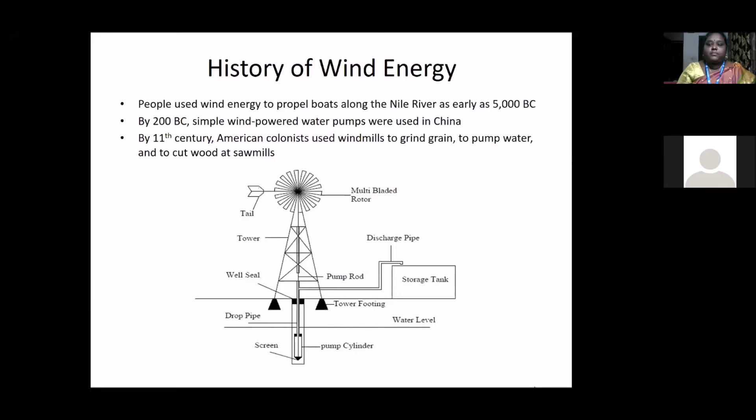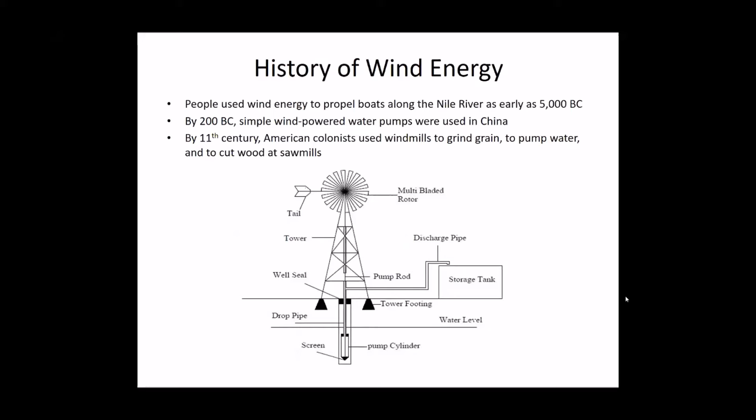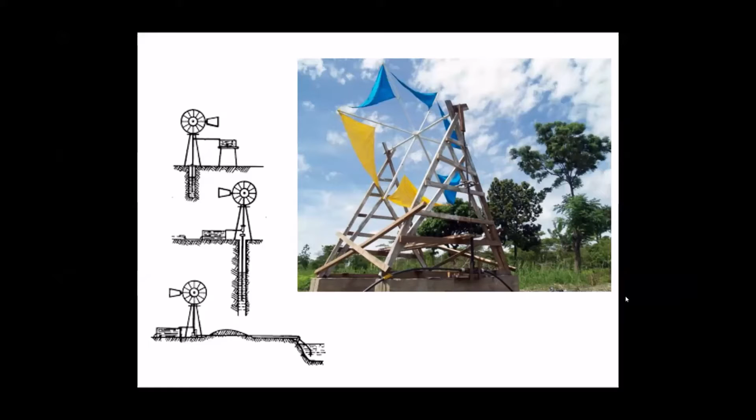So with the help of this oscillating or rotating motion, we have pumped out the water from the soil, which we use for rural irrigation next to our college.

One more important topic, guys: windmill and wind turbine. Both are two different topics, but these two words are generally commonly associated with many people - when they see a wind turbine, they call it a windmill. Windmill is a completely different story, and wind turbine is a completely different story.

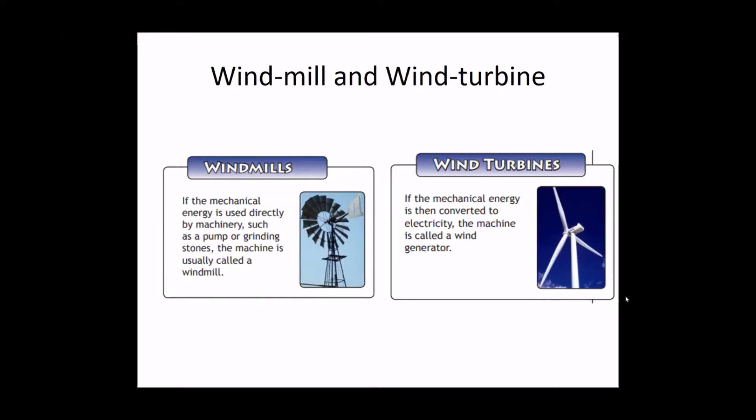Windmill generally uses wind mechanical energy, and that is used only for certain machinery applications like pumps or grinding stones or pumping water. A wind pump is a windmill. For some areas, they even grind with the help of wind energy, so those are windmills too. When we generate electricity out of that, it becomes a wind turbine - else it's just a windmill. Make sure from today onwards, after this session, windmill and wind turbine should be differentiated.

We have two different types of wind turbines. Generally, the classification of wind turbines can be huge, but in general we have two main types: one is a vertical axis wind turbine, and another one is a horizontal axis wind turbine.

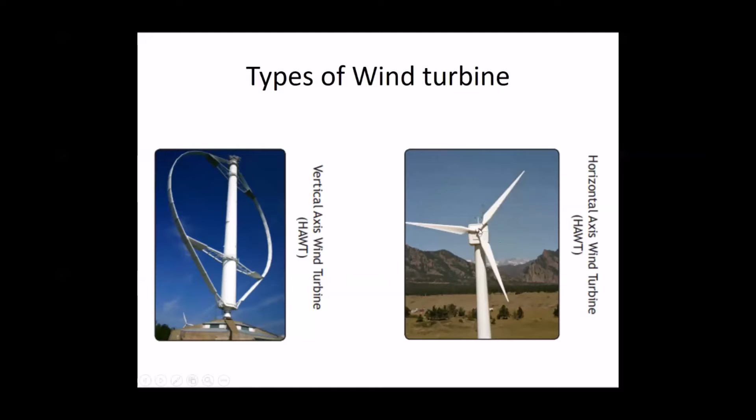In a vertical axis wind turbine, you can see this one center pillar - this is called the tower. So the axis of rotation here is in the tower, and it's perpendicular to the ground, which is why they call it a vertical axis wind turbine. In a horizontal axis wind turbine, the axis of rotation is perpendicular to where I'm pointing, and parallel to the Earth's surface - so this is called a horizontal axis wind turbine.

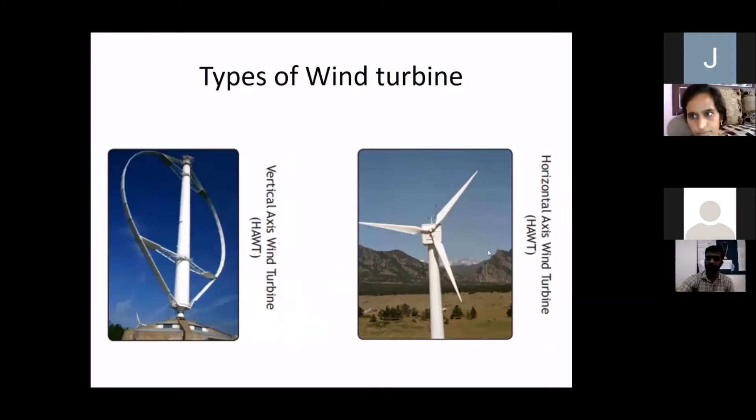In most of our common engineering applications, we find horizontal axis wind turbines as a major advantage, because in vertical axis wind turbines, each of the blades cannot get wind at the same moment. As the height above the ground increases, the speed of the wind increases, so to get the maximum efficiency, we need the maximum wind speed.

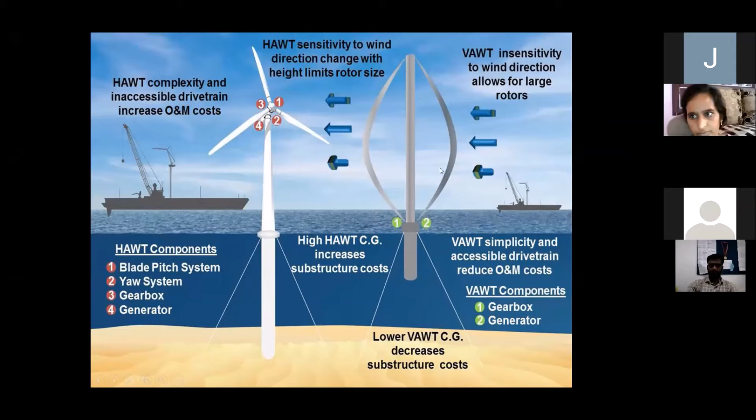In order to get the maximum wind speed, we have to get the maximum height of the tower. But if you have the maximum height of the tower, at the top you'll get very less efficiency because of the shape - it's somewhere near the center, or elliptical, towards the bottom only. So even though the height of the tower is increased, this cannot get the maximum efficiency.

Whereas in a horizontal axis wind turbine, the height of the blade, the height of the axis, or the height of rotation and speed directly depends on the height of the tower. So the more the height of the tower, the more the efficiency of the turbine. For commercial applications, we generally go with horizontal axis wind turbines, and for very small applications like less than 100 kilowatts, or even 5 to 50 kilowatts, we go with vertical axis wind turbines.

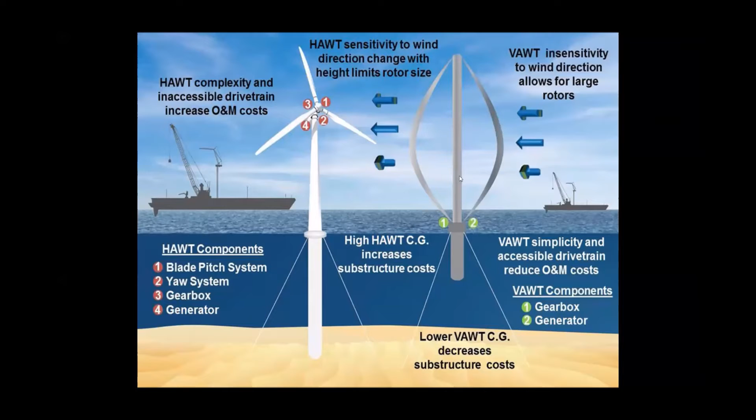This vertical axis wind turbine is generally used for home applications. It is very low in cost, around 4,000 to 5,000 rupees for one small turbine. We can even make it at home, and use it to charge a battery and a fan for us. I'll show how it actually comes.

Coming back to wind energy and the history of wind energy - how does a wind turbine work? Even with a huge tower, we completely rely on the wind direction and the lift force of the wind. So even if you have a big tower and a big blade, the shape of the blade and the angle at which the attack comes, and the angle at which lift is generated, are all very important criteria for a wind turbine to work.

All the fluid dynamics comes into picture on this aerofoil shape. These aerofoil shapes were designed in such a way that, before designing, there are two things to consider. When air or any fluid comes and hits a surface, there will be two things: one is lift, the other is drag. If the drag is more, the object will not fly, it will come down. If the lift is more, the object will fly.

These aerofoil shapes are designed so that when air hits them at a particular angle of attack, the resultant force of lift and drag drives the turbine or blades to rotate. The lift will be more than the drag, so the resultant force lifts it upward, creating rotation. In this way, we convert the kinetic energy of the wind into mechanical energy.

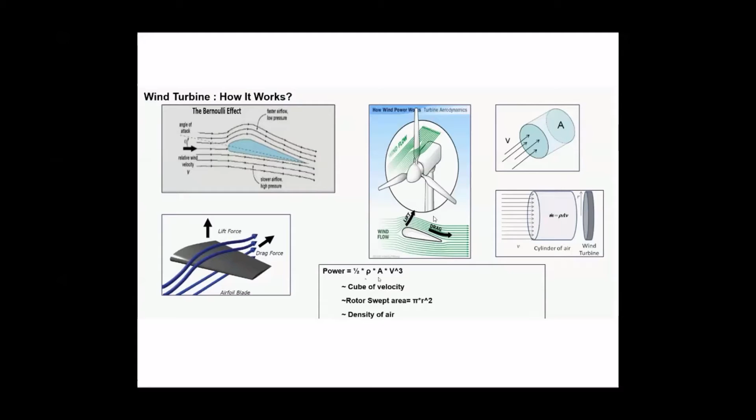Whenever you think of the efficiency of a wind turbine, first we need to know the efficiencies of different renewable sources. Let me compare wind with solar energy. With solar, the maximum commercial efficiency - and commercial efficiency differs a lot from standard efficiency since it accounts for all operating conditions - comes out to roughly 9 to 15%. 15% is also under very standard, optimum conditions. So 9 to 12% is the common or general efficiency we achieve in solar energy.

But when it comes to wind, the value I'm showing is also a theoretical value. If anyone asks the maximum wind turbine efficiency possible, the answer is 59%. It cannot go beyond 59%, and this is a standard value. But with some turbines I've worked on, like Siemens Gamesa or Vestas wind turbines, they can generally give around 35 to 40%.

45% efficiency turbines are considered much better, the greatest design we can achieve. In general, we achieve 35 to 40% efficiency. But the maximum wind turbine efficiency that can ever be achieved is 59%, derived from a theorem by a great fellow named Betz. If you search Betz's law on the internet, you'll find it - it's a very common theorem. He stated it cannot be achieved beyond 59%, and all wind turbine designs are based on this.

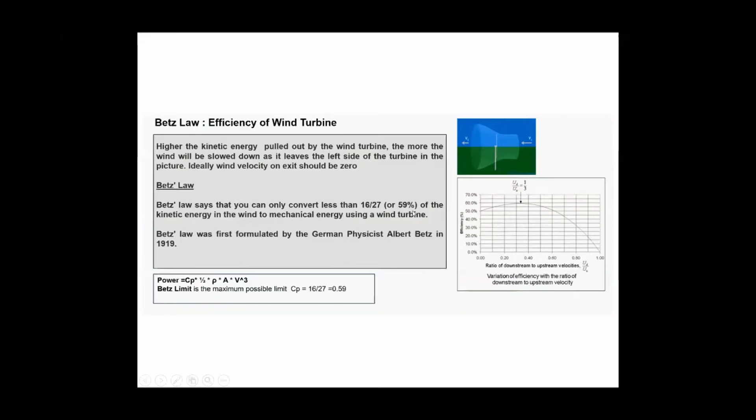When we come to components of a wind turbine, we'll be discussing horizontal axis wind turbines more, since that's the trend we follow commercially. I'm not denying vertical axis wind turbines - we do design them - but they're not used much for commercial applications.

In a horizontal axis wind turbine, we have three different parts: tower, nacelle, and rotor. The tower is generally just a column on which the complete nacelle and rotor sit. Apart from that, there's no particular purpose for the tower, but just imagine the weight it carries.

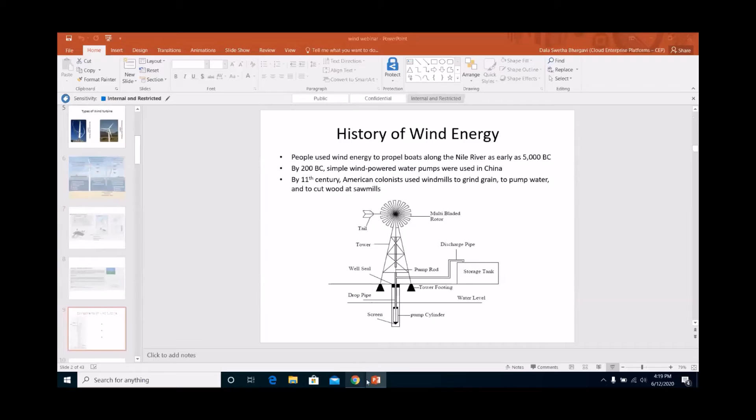I think everyone is muted, right, Hemanand sir? Yes, sir, everyone is on mute. Okay, muted, fine. If you can proceed, unmute, okay fine, I understand. Yeah, it's okay, muted. You unmuted them, huh? Yes, yes, you can proceed.

Shiva, okay, see, imagine the weight of this nacelle - it's not just 100 kgs, or 200 kgs, or 1000 kgs. For a 3 megawatt turbine, the weight of the nacelle is almost 300 tons. Just imagine the weight of this nacelle, for a 3 megawatt turbine which is considered a very standard size. The weight of the nacelle is almost 300 tons, and there are countless things inside that nacelle. It seems very small from the bottom, but it's the main heart of the complete turbine.

And you can see these blades - we have three different blades and a rotor. A rotor has the shaft which converts the energy of the blades to the nacelle. This tower completely takes the load of almost 300 to 400 tons.

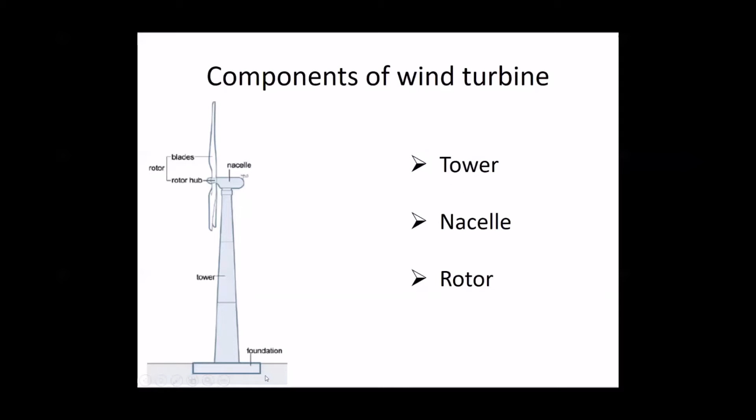It can be even more, and that complete tower weight will be transferred to the foundation. So we'll go in detail one by one on how a tower is constructed, how a nacelle is constructed. Then I think we'll get a much bigger idea.

If you see tower construction, these sort of lattice towers you can see in many places. For example, if anyone has taken a road drive from Chennai to Bangalore, you can see these sort of turbines in number. I think at least I have witnessed them.

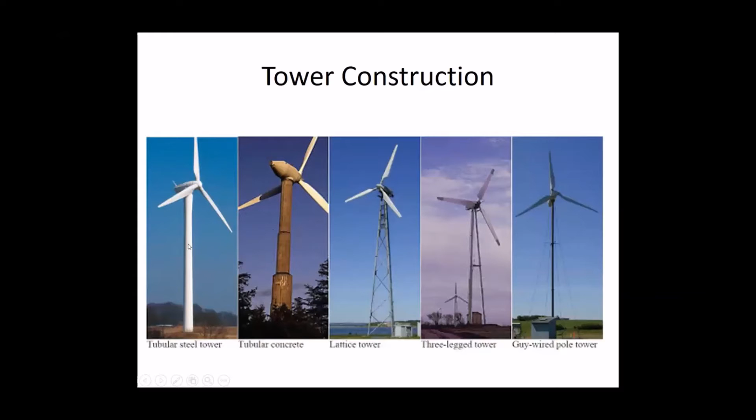When you see tower construction, the tower is generally made up of different segments. If you see a tubular cross steel tower, you'll have different sections: lower segment, middle segment, upper segment. Why? Because we cannot erect the complete turbine in a single stage—the tower cables will be too huge and too high, there would be very big, gigantic moments on this segment.

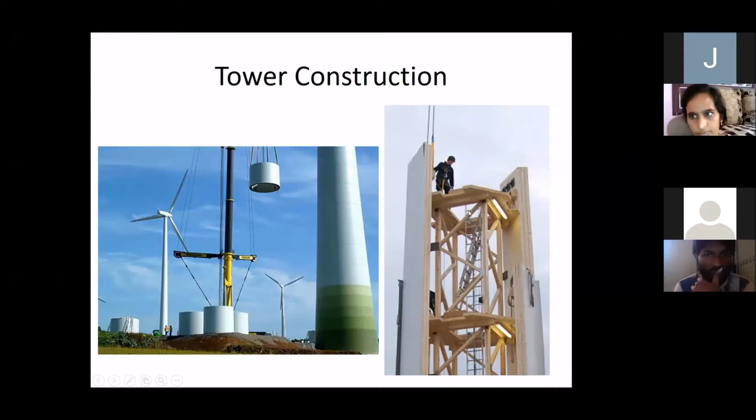So segment by segment we go like this, and in that segment by segment we'll have different platforms, different structures inside. This tower is also used to access service personnel from the bottom to go to the top, up to the nacelle or up to the blades, for any maintenance, repair, servicing, or cleaning. So this tower is the only access way for him to go, at least for onshore turbines.

So in the tower there will be a ladder. I have a picture, I guess—yes, so this is a picture. In this picture you can see this is a ladder inside the tower. This ladder is mounted onto the tower's internal diameter, and you see a platform over here.

There will be segments, n number of segments like this. These number of segments will be mounted one on one, and this ladder will be erected inside. So service personnel come from the bottom with the help of this ladder, walk on, and come to the top, to the nacelle, for any service operations.

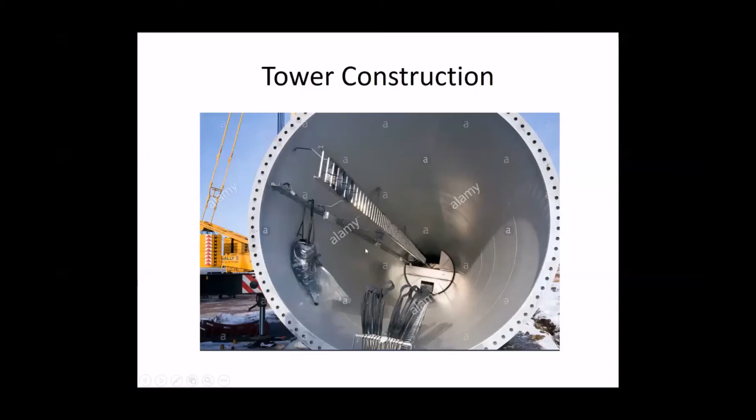Apart from this ladder, there are also some new accessories where they are using lift-type things in some particular applications, but the ladder is the most conventional way. So one by one, this will be erected, and after the erection of the tower, they will erect the nacelle, and then after that they will attach the blades and the rotor. I think there are a number of videos—

—showing the weight and the complexity of the design itself. Just go through those videos on YouTube, you can get a feel for the tower and nacelle construction.

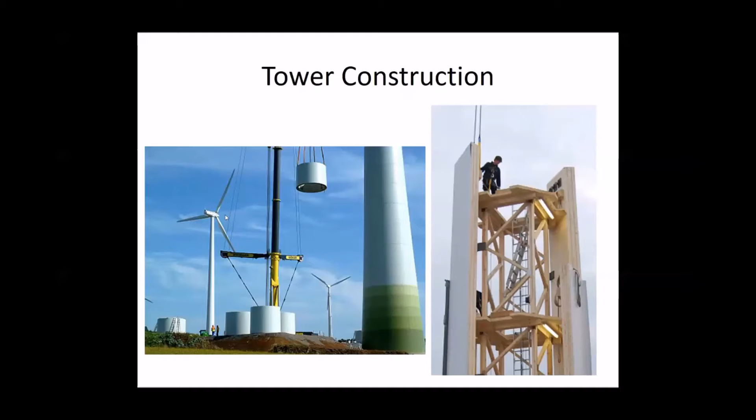So when we say nacelle construction—this is the tower we are discussing over here, and there is a yaw motor, which I will explain in the coming slides. So once the wind energy, which is kinetic, is converted into the rotational energy of these blades, this rotational energy of the blades rotates the—

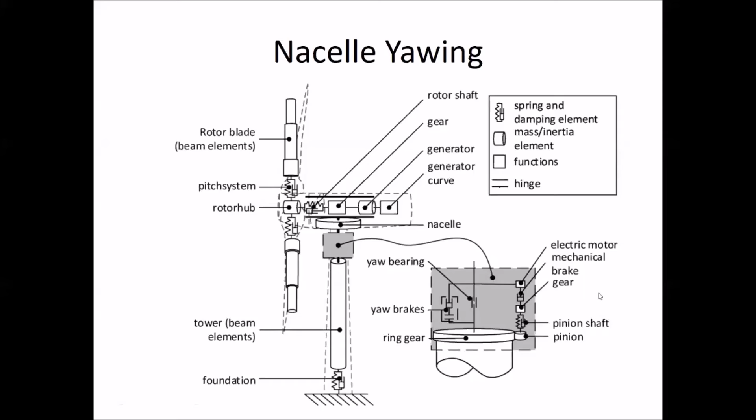—blades rotate about this axis, so this yaw axis comes on this side, and it will be rotating in this direction. Imagine this motor's capacity, because the nacelle weight is too huge, such that they rotate the complete nacelle about that axis, from where we get maximum efficiency. So this is one of the major, critical mechanisms, because you have huge weight and you have to rotate it using motors—those motors also have to be very high efficiency, high performance motors. There is another part that I left out on the nacelle—a cooler top.

For example, if you see the wind turbine, there are a number of heat generating components. Because of these rotations, there will be huge amounts of friction heat generation. Because of this gearbox and this generator, you have huge amounts of heat. Although they have internal air cooling or internal water cooling or liquid cooling within their systems, some part of the heat will be transferred outside this gearbox or the generator enclosure.

So you'll be having more heat generated in this particular room, and this nacelle is completely enclosed such that there won't be any airflow or water flow from outside. So the heat generated by this will not be cooled. If the temperature of the nacelle reaches some particular limit, then the nacelle automatically stops. Else it will be a threat to the generator and the gearbox, because these are very costly items. We cannot risk them.

So there is a sensor actuated in the nacelle, such that when the temperature of the nacelle reaches some particular temperature, say 30 to 32 degrees centigrade, or say 38 or 40 degrees centigrade, then the nacelle stops. Then the rotation stops. So in order to cool that heat generated, there are certain pipes in which liquid is circulated throughout the nacelle.

That liquid is, I think, 50% glycol and 50% water. The reason for using glycol over here is, for example, in certain icy conditions or snow conditions, this glycol does not freeze before the water.

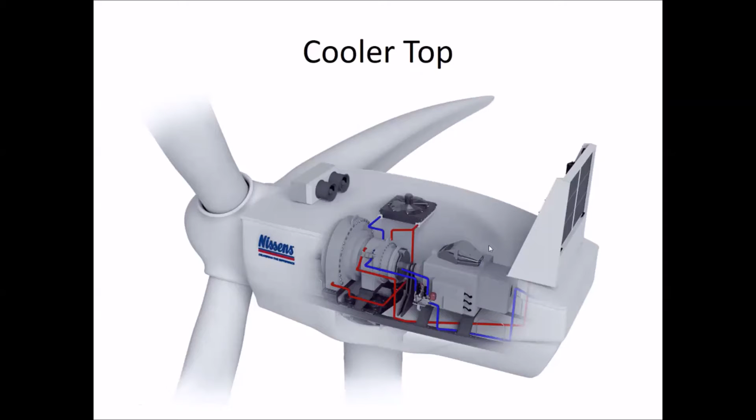So for example, if you have only water inside those pipes used for cooling, then obviously in certain snow conditions the water freezes and it does not take out the heat. But in order to not let the water freeze, they add another liquid named glycol, 50% glycol and 50% water, such that it won't freeze.

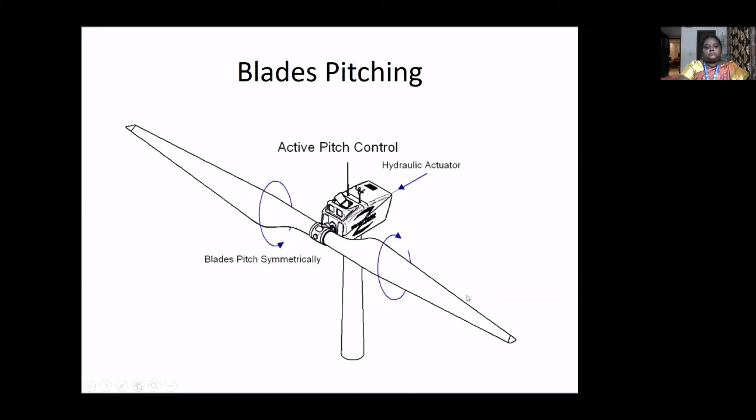And nacelle yawing - in this yawing, what will happen is if the wind direction is not here, if the wind is over here at the rear end, then also the blades cannot be lifted, because you won't get any power, since the air is more at the back side of the nacelle. So there is one more mechanism inside the nacelle itself, where the complete nacelle rotates about the axis.

You can see this is the yawing motor. This cross section is what I have shown, this detailed view. So you can see in this there will be yaw bearing and yaw motors, where they rotate the complete nacelle along with the blades and the rotor. So this complete set on the top is rotated about the axis over here, and they go to the direction where there is more airspeed, so that the blades can be lifted easily and more power will be generated.

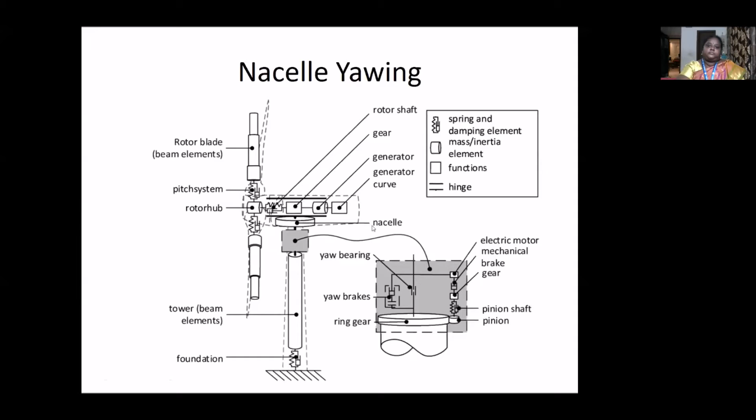So these are some mechanisms to get the maximum power output. And there is one more system named cooler top over here. So this is the cooler top.

So when you see the cooler top, generally there will be a lot of heat generated by the gearbox and the generator. Even though they have internal cooling systems, these guys generally will have more heat generated outside. But this nacelle cover, what you have on the top, is completely air sealed and completely water sealed. They won't let any outside air to come inside.

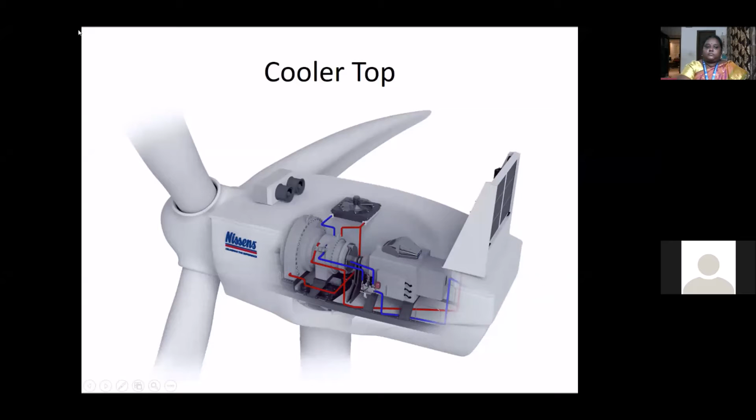They won't let any outside rain come inside. Why? Because the outside air might be corrosive. The outside water might create problems to the gearbox and the generator for electricity. So this is a complete airproof and waterproof system.

So if there is no air circulation inside, then obviously because of the heat generated by the gearbox and the generator, there will be more temperature inside the nacelle. So this higher temperature will again make the system stop, because as the temperature increases inside, the performance of the generator and the gearbox reduces.

So there is one sensor, a temperature sensor inside, thermostat sort of, where it checks the ambient temperature of the nacelle, such that if the temperature reaches some particular value, then it automatically stops. Then turbine rotation automatically stops. So what this will actually do - this cooler top has some particular pipes inside it.

So if you see these particular pipes inside, what these pipes do is circulate a liquid. That liquid is 50% alcohol and 50% water. The reason behind using it, it's not alcohol actually, it's glycol.

Reason behind using glycol and water is, wind turbines can be placed or mounted in icy conditions or snow conditions, or somewhere inside snow mountains where there is more wind. At those places, if you place water inside these tubes, the water gets frozen, and there won't be any water circulation for heat removal.

So what actually will happen? That's why they add 50% glycol and 50% water inside those pipes, and the liquid is circulated throughout the nacelle. When it is circulated, it absorbs the heat generated by these two drivetrain components, and from there that hot water comes over here. This is like a heat exchanger mechanism, a small simple radiator mechanism like in our cars, or a simple radiator we see outside.

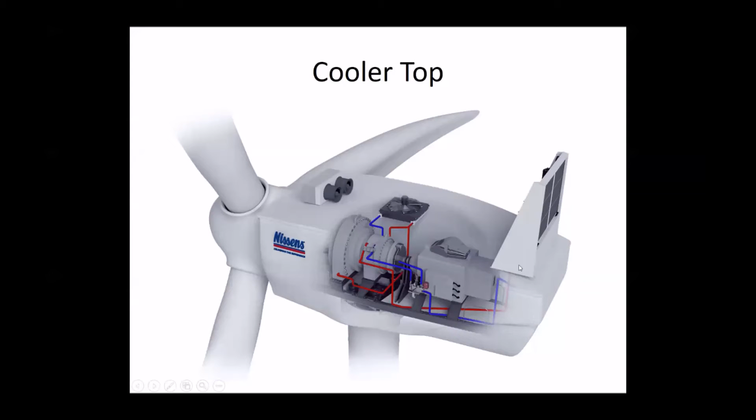Drivetrain components actually mean gearbox, generator, and transformer. Here I'm not showing a transformer inside the nacelle, but in Vestas wind turbines, they have transformers also inside the nacelle.

So this is how a Vestas wind turbine actually looks. It's a 3 megawatt turbine. If you see, this is the cooler on top. The hot liquid inside the pipe comes to the top, and the hot water is thrown in from this side. Because of the air circulation on top, this gets cooled, and the cold water is circulated back. There are some pipes over here.

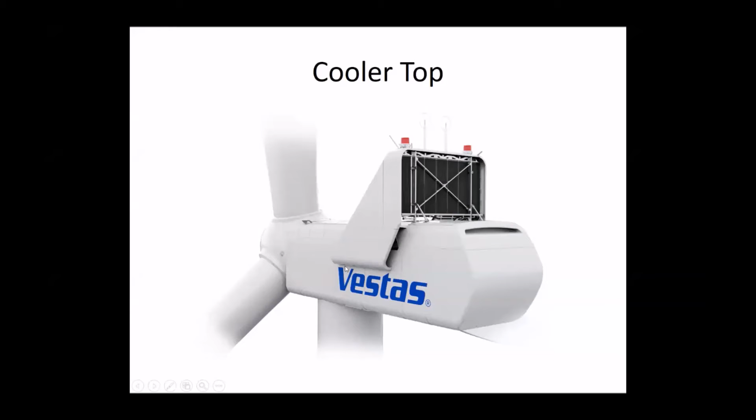When the cold water is circulated over here, it is collected and recirculated back in, and then the hot water again comes back. A simple air cooling mechanism.

Coming to some new trends or technologies, we have gearless and geared wind turbines. Guys, gearless and geared wind turbines, this is something that has evolved only in the last 10 years. When we say geared wind turbine, it means it has a gearbox with a gear ratio of 1 is to 100, as I have discussed earlier.

So on the left side, the gearbox in a geared wind turbine is similar to what I have explained till now. It has a low speed shaft, a gearbox, and when it comes to high speed, that's all. But when it comes to a gearless wind turbine, this is something that has evolved more in the last 5 to 10 years. When you see a gearless wind turbine, there won't be a gearbox.

So the power is transmitted directly from the shaft to the generator itself, there won't be any gearbox in between. So the rotation of the blades is transferred from the low speed shaft, and from the low speed shaft itself it directly goes to the generator.

So the generator will have huge permanent magnets, where they take more power, because here they don't have a gearbox, so the complete speed rotation of the wind is directly proportional to the amount of power generated. For example, in offshore wind turbines, that means which are more on the sea itself, they have more winds.

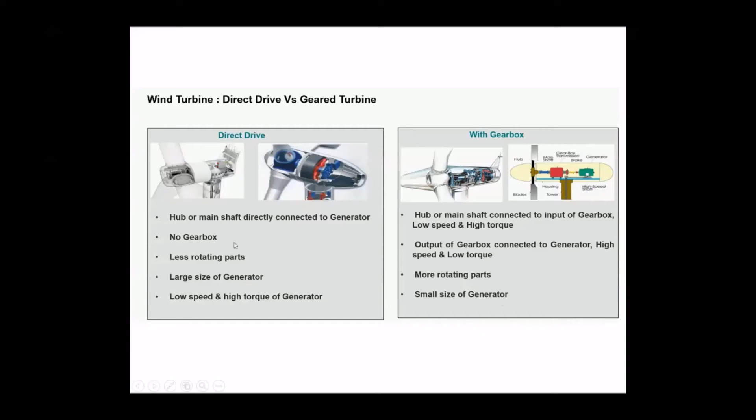Why? Because we don't have a gearbox, we are directly connecting to the generator where we have huge or bigger permanent magnets to get more power. This actually increases the complexity of the generator but completely eliminates the complexity of the gearbox. This is used for particular applications, and with gearbox is used for other particular applications.

Now coming to the future trends, the future wind turbines, what actually these do. Till now, what I've discussed are all existing, already proven technologies. But in these coming slides, we are going to discuss more of the future projects or future trends.

The future wind turbines will be bigger, smarter, and hybrid. By bigger, I mean not only the rotor size but also a bigger tower, which should be huge. By smarter, there are very smart solutions getting involved into wind turbines. And by hybrid, there are many beautiful applications of hybrid wind turbines. We will discuss each one in detail now.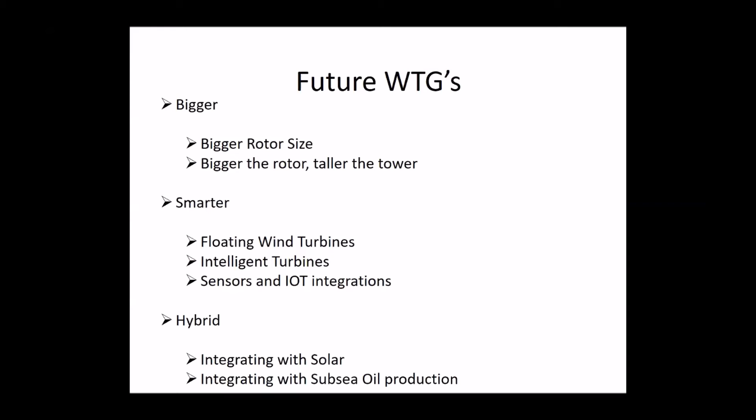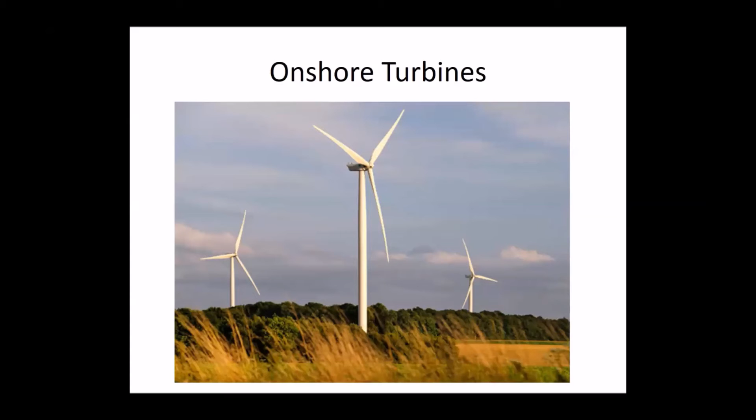Before that, let me explain what an onshore wind turbine is and what an offshore wind turbine is. Remember it this way: offshore means the wind turbine is installed on the sea, onshore means it's installed on the land. So onshore wind turbines are generally installed on land, and offshore wind turbines are generally installed on the sea, inside the sea you can say.

Now, there are this many number of wind turbines. For example, some countries like Denmark and Netherlands generate 100% of their electricity from offshore wind only, and there is excess energy which they even sell to other countries. There's no coal or hydro there because they have huge winds.

In offshore wind turbines, land based is onshore, and up to 50 meters you can see these foundations getting bigger and bigger. For greater than 1,000 meters, this is a new topic, 500 to 1,000 meters and so on. Till now, at least the proven technologies or commercial applications are only up to about 50 to 200 meters, where they have a huge foundation at the base, from which the tower is erected, and from there the wind turbine or nacelle is erected.

But these three categories, deep water, very deep water, and ultra deep water, will be covered in the next slides.

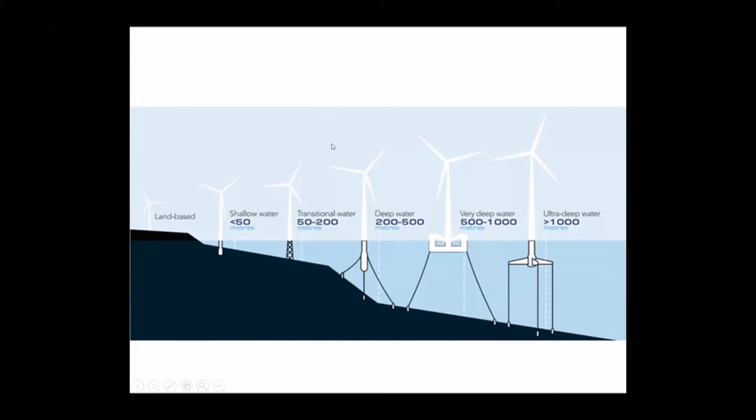Guys, just note down one name. There is a company named Principle Power, P-R-I-N-C-I-P-L-E Power. They have patented this floating technology. It's a very beautiful technology. If you open their website, they have shown the complete 3D view. It's a really beautiful technology.

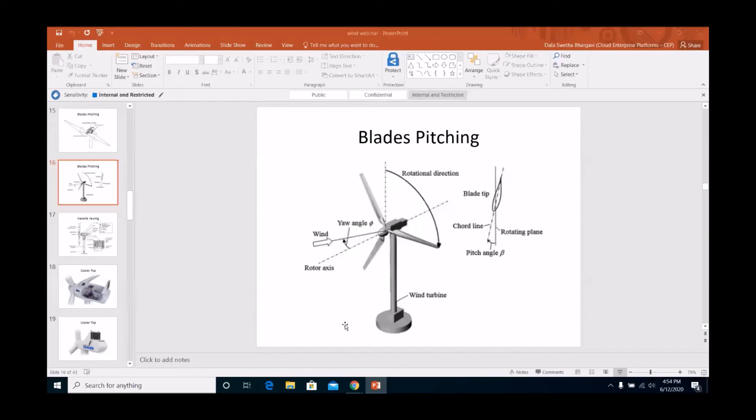I'll just mention it here - Principle Power. Just go through this website, you'll find it there.

So a new concept has been developed called the floating wind turbine concept, where the wind turbine floats on the water. This is a completely new trend, but it's already proven in the last 2 to 3 years, which is why I gave you that company's name. Just go through that website, you can find some beautiful information.

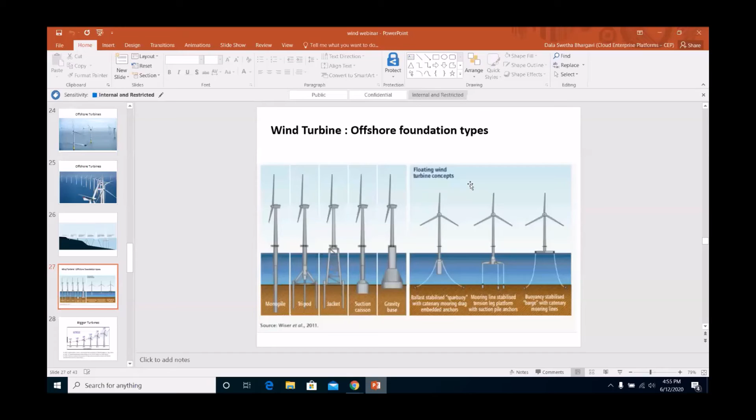Someone also asked me what is the biggest wind turbine, what is the maximum power that can be generated. Ideally, when I was born, really from 1990, there was just a 0.5 megawatt wind turbine, at a height of 40 meters. This 40 meters is not the total height.

The maximum diameter of the wind turbine blade, this we call as the rotor diameter or swept diameter. That diameter is what we show.

From 1995 it was 1.3 megawatt. Slowly by 2015 it became 10 megawatt. I can even tell you the company's name.

It's Vestas wind turbines, they made 10 megawatt with 145 meters. After that Vestas wind systems developed further, and I think I was part of this project in 2015 with Vestas. After that in 2017 GE Wind actually created a storm, making 13.5 megawatt. This was an awestruck moment, everyone said 13.5 is too huge.

In 2020, I'm lucky to say it's my own company, the company I'm associated with, Siemens Gamesa wind turbine, actually started developing. I wouldn't say developed, the concept was freezed maybe by 2022. Siemens Gamesa renewable energy.

They've targeted to plan 15 megawatt, already announced on LinkedIn and elsewhere, you can check the links. Now 15 megawatt is the biggest generation planned, though this is not yet proved since it still has to be developed. The design is freezed and this will definitely work.

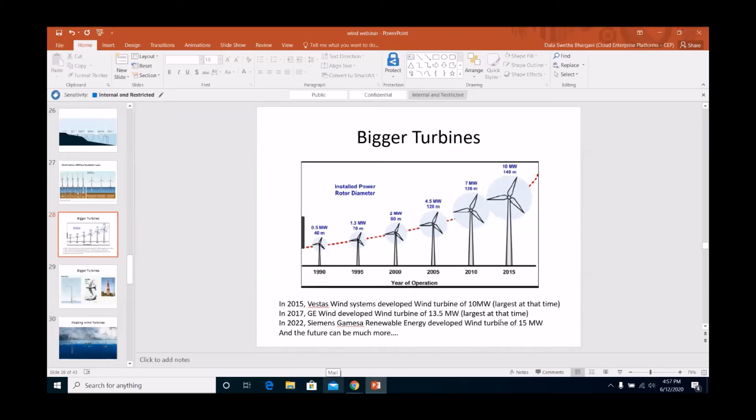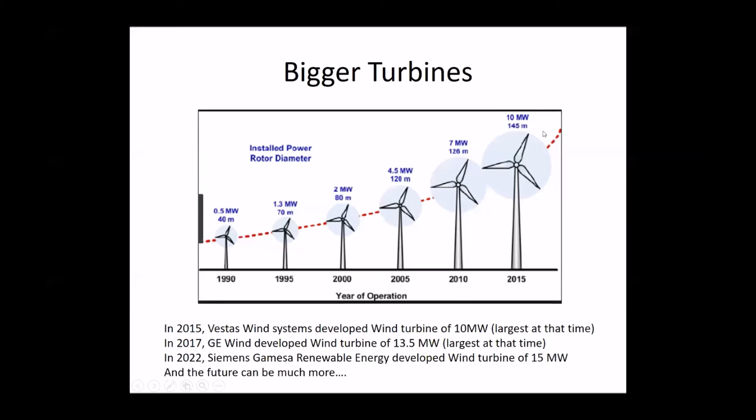So imagine the 10 megawatt turbine, that much bigger diameter the rotors have. How big can the diameter be? For example, with one Siemens turbine at 154 meters, compare to 145 meters, that is almost a 10 to 11 megawatt turbine. This is an Airbus A380.

The width of this Airbus A380 is something like 79.8 meters. So the radius of this wind turbine, or the length of the blade, is equal to one width of the aeroplane. That's how big the turbine will be, that's how big the rotor diameter will be, and based on it, that's how big the wind speed needs to be.

That's the reason, based on this wind speed requirement, we are now concentrating more on offshore wind, moving towards technologies that help us develop offshore wind, which is installing wind turbines on the sea.

Can anyone guess this? This is Qutub Minar, in New Delhi, which everyone has seen. The height of this tower I'm showing is 120 meters, while the Qutub Minar itself is 73 meters.

So 120 meters high tower plus a 154 or 158 meter diameter rotor, equal to the length of the blade span, equal to the width of an aeroplane, that's what bigger turbines mean. And this is only for 10 to 11 megawatt, now imagine the sizes when it comes to the 15 megawatt that Siemens is proposing.

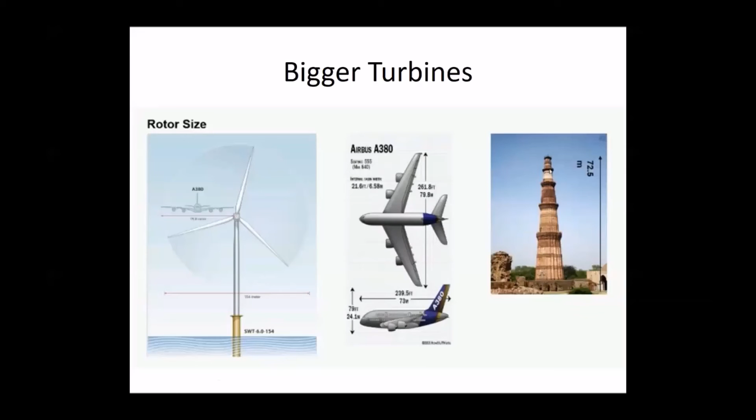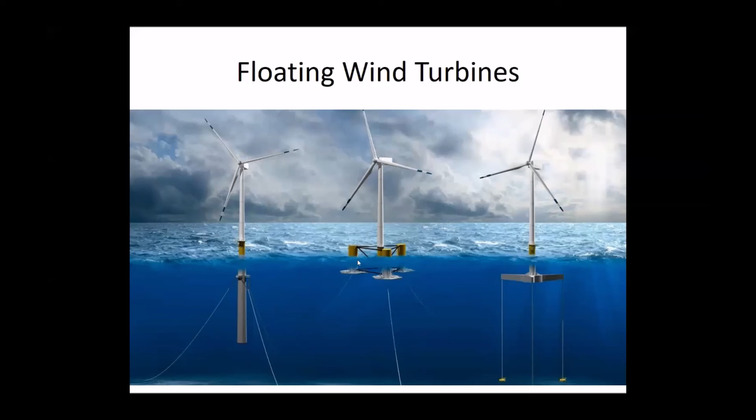This is actually balancing on the sea with the help of buoyancy force, the same concept applied to submarines. This is not yet commercially proven, but it is technically proven. I've given you a company name - they have already installed these on some California seas because they have huge winds over there. This is one of the technologies coming into advancement in the near future.

This is how they balance these three, and these three are in equilibrium in the water. Imagine the weight of the complete turbine will be on this. I'm also very interested to work on one of these projects if I get lucky. Unfortunately, in India we haven't started these things, but in some foreign countries like the USA, they have already started implementing these designs.

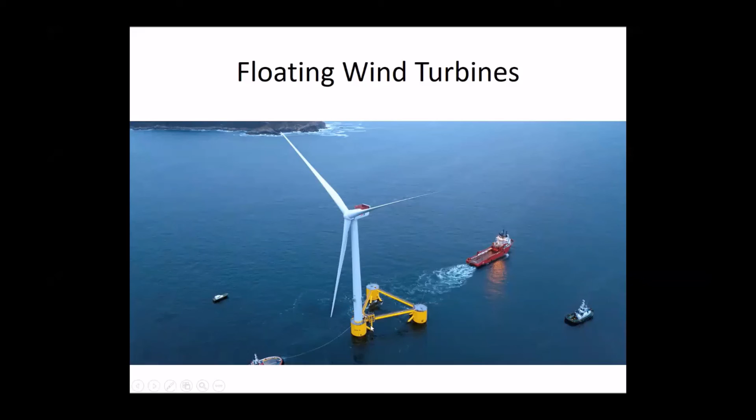Coming to hybrid wind turbines - imagine wind is one particular story, solar is another particular story, where hybrid combines wind and solar, two different sources. When you mix these two, you can get more power.

There is another hybrid way where in a particular wind farm, between one wind turbine and another, there will be some gap because of the diameter of the rotor. In that gap, they have started installing solar farms, so both can be used parallelly for power generation. I have one patent on this, where I added a hybrid mechanism of solar onto the wind turbine.

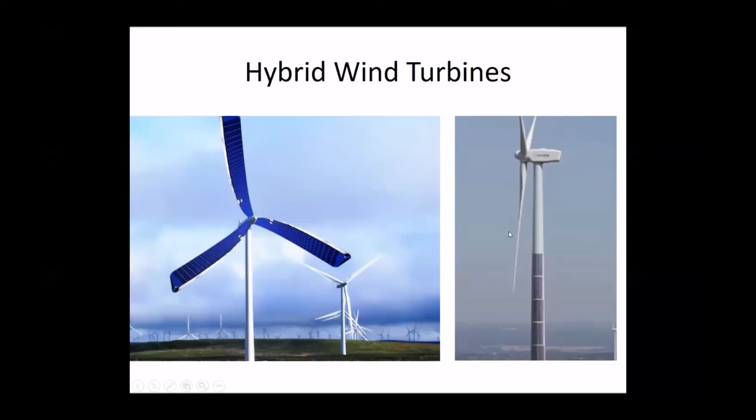Coming to one more interesting topic - before starting this, I think Venkat has asked me a question on where we use brakes.

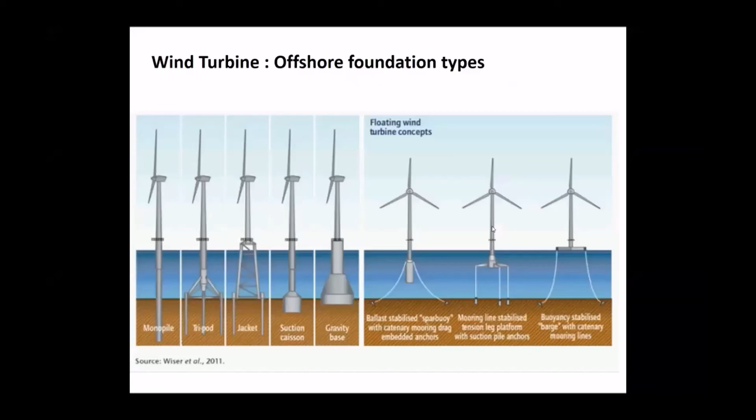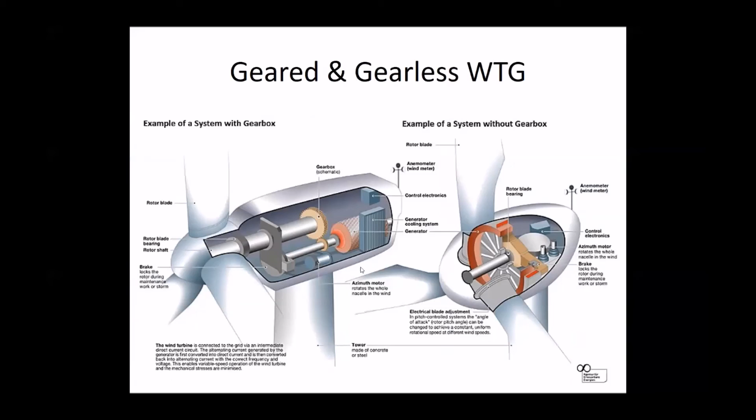For example, imagine a person is coming to inspect or service the wind turbine. The person comes from the bottom, climbs the complete ladder, and reaches the top. From there, he has to start inspecting. But he cannot start inspecting a wind turbine while it is working.

Why? Because of the heat or the moving parts of the generator. If you want to service a generator or gearbox, he cannot do it while they are functioning or working - he will definitely die because of some movement or rotation motion. It's an HSE issue. So what he has to do is stop the movement of the gearbox or the generator. Now how will it be stopped?

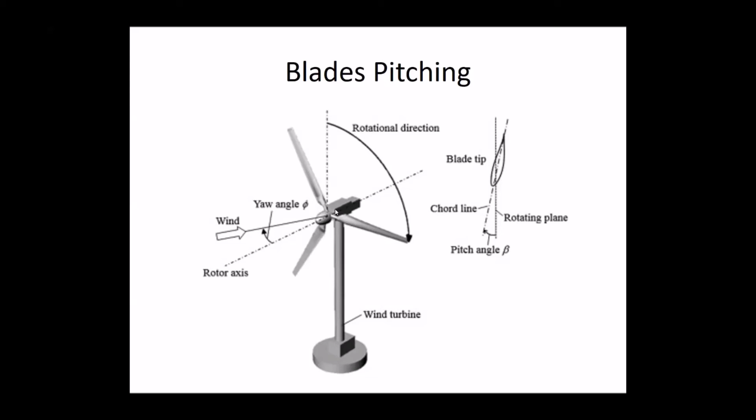He has to stop the movement of the low speed shaft, else he cannot stop the generator. So he has to stop the speed of the low speed shaft. Then how is that done? He has to stop the rotation of the blades - but he cannot stop the rotation of the blades because the wind will never stop.

So we need a brake which stops transmitting power from the blades to the low speed shaft. Now the low speed shaft will not have any power, and there will be certain locks. Once the brake is applied, they apply a lock on the rotor so the rotor will not rotate. This is called a rotor lock mechanism - a hydraulic rotor lock mechanism.

From this brake, the low speed shaft will be stopped, and then the generator and gearbox will be stopped. Then he can start servicing or repairing these issues. So this is where we use brakes inside the turbine. I think Venkat, this should be clear, right?

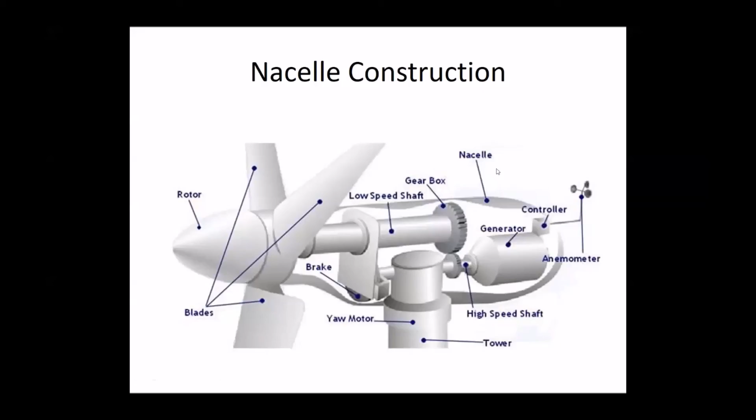Now coming back to subsea oil and gas. This is one of the more interesting topics, where we are planning to integrate. Siemens and some other companies are planning to integrate as well.

Just a second, hello. Madam, go ahead. Five minutes, five minutes. So guys, this offshore wind turbine... I'm getting some disturbance. Just two minutes, we are done.

So this is subsea oil and gas production. Generally there are two types of oil and gas extraction: one is when we extract oil from the soil, the other is when we extract oil from the seabed. Till now, what you might have witnessed is extraction of oil and gas from the soil itself. But we have even started to extract oil and gas from the subsea, from the seabed, which is 3,000 meters deep in the sea.

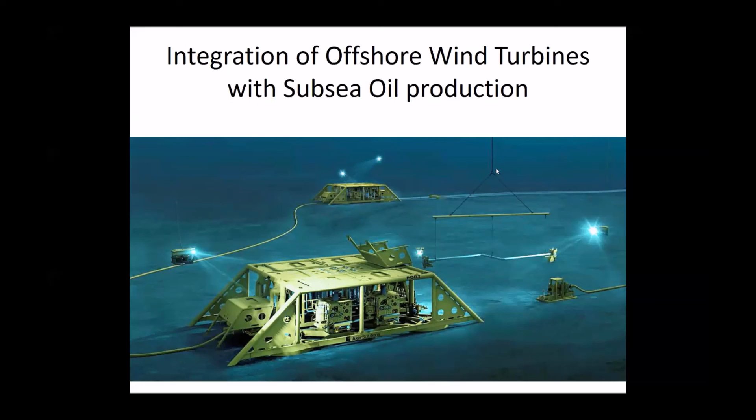These are some pictures I have shown from a company known as Aker Solutions, which I worked with. They design equipment and mechanisms which extract oil and gas from 3,000 meters, even 2,000 meters deep inside the sea. They extract the oil and gas completely from there with different mechanisms, and then move it towards the rigs, and from there it goes to the shore.

But in order to extract oil and gas from the seabed, they need particular power for control mechanisms, motors, or pumps. So to get this external power, they are now integrating with wind turbines to extract the subsea oil and gas. This subsea oil and gas is a completely new subject and a new domain. It's a premature subject which will be of great use in the future, and offshore wind turbines will be integrated into this for future production.

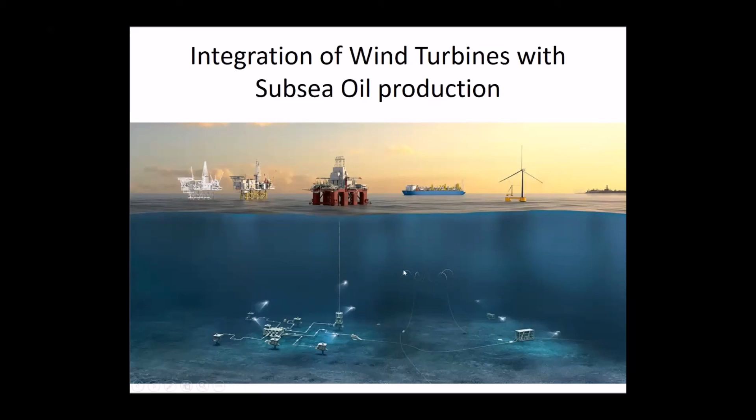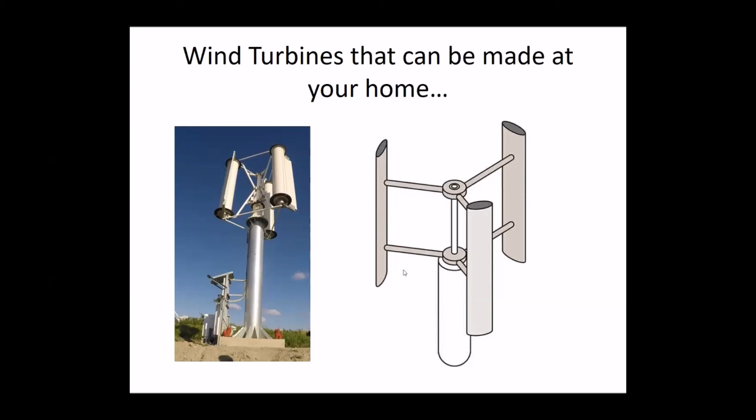Just so you know, if you have enough time and a budget of around 5,000 rupees at home, you can make these wind turbines at your home. I made one wind turbine at my home which is giving power to my family. So this is how we can even make it ourselves.

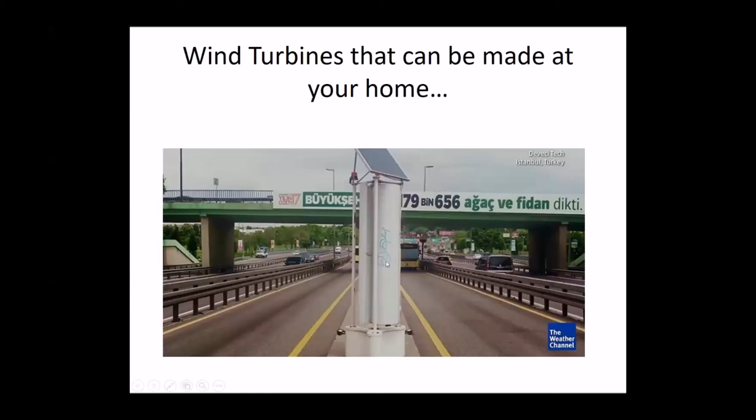This is one of the technologies where, when a car or truck moves, a turbine automatically rotates, which generates power. These are some technologies that are already developed and rotating. When the truck or bus moves, there is airflow, and that airflow is used for rotation, causing electricity generation. These are all things you can do at your home.

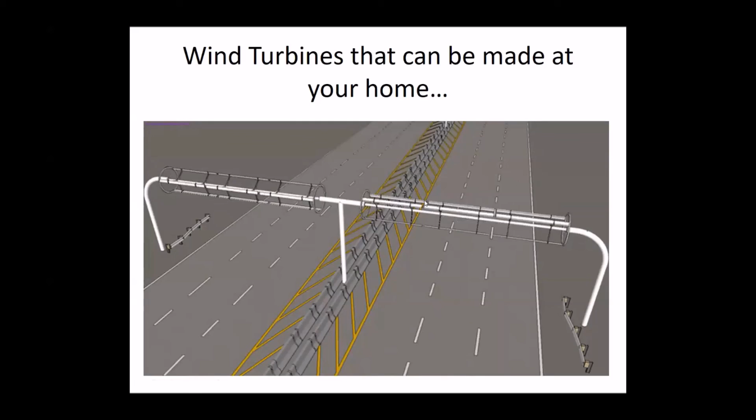I think I'm done with the presentation. Any doubts from your end?